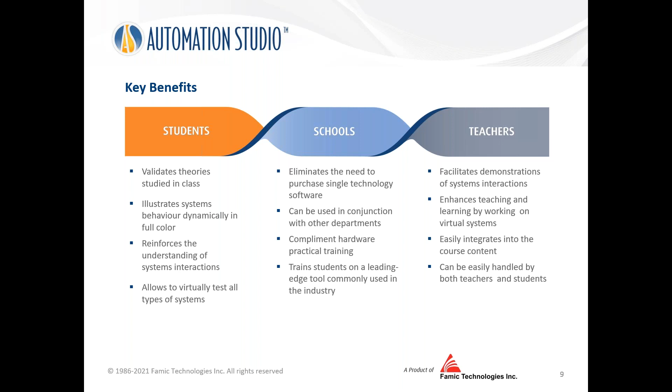We also have some exercises embedded in the software so students can learn and practice on it. It's virtual—right now hardware is a little bit difficult to get, so now we have the virtual software.

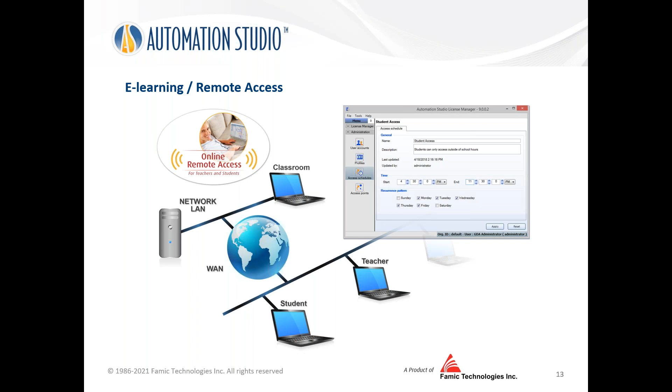We have network licenses, so students can practice at home and teachers can teach from home online, and they can interact with each other to learn different technologies—PLCs, electrical, pneumatics, everything in electronics and automation.

There are different markets like technical high schools, workforce development, vocational centers, technical colleges, universities, and so on.

We have a lot of industrial clients in agriculture, like AGCO; in construction, Caterpillar; in mining, John Deere; and in transportation, Honda, and so on. We also work with a lot of manufacturers' catalogs, including hydraulic, pneumatic, and electrical components, for example Mitsubishi and Eaton, and so on.

So I'm going to show the software and take a few examples so you can feel how we teach in this new norm, and how our software has a very good quality, providing quality education.

The first thing is, in one software we put all the technology together, and you can click and do whatever you want. For example, for mechatronics, pneumatics is a typical subject—you just open it to see. For example, teachers need to teach the symbols, so take the symbol. Traditionally, teachers use PowerPoint or PDF to teach symbols.

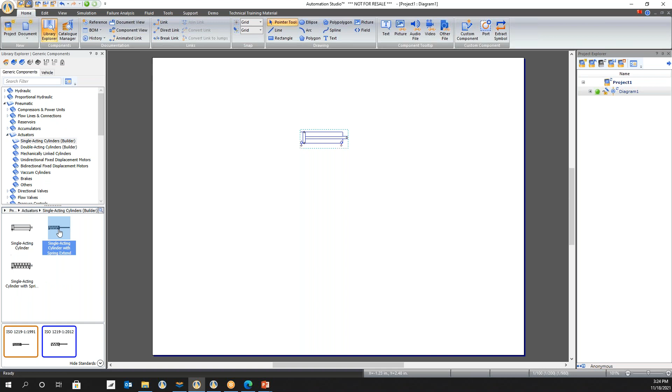Right now, we have a large library, and teachers can teach all the different types of cylinders. Now we can take others and build the circuits—this is component level. Also, we can teach at a different level.

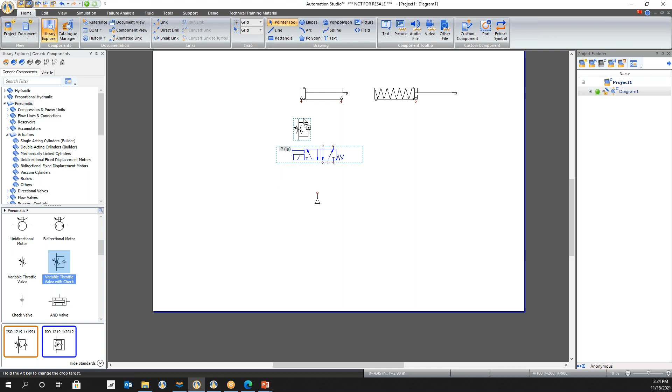At this level, we use different components together, and I put everything together—the exhaust and so on—and then we just connect them together, and I connect this one.

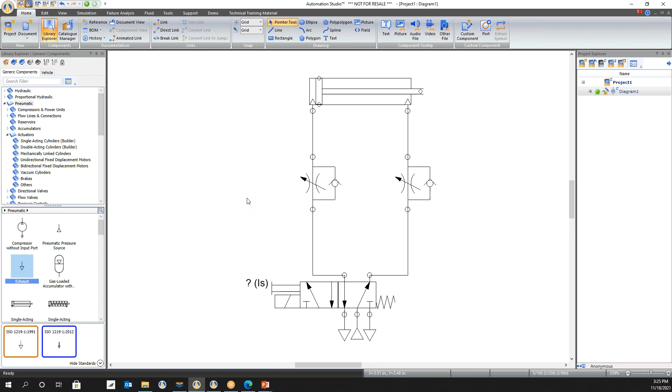So we can easily build a circuit. You can customize it. That's why there's no lab right now needed - all students can practice at home with the software, and then they start simulation to learn how it works.

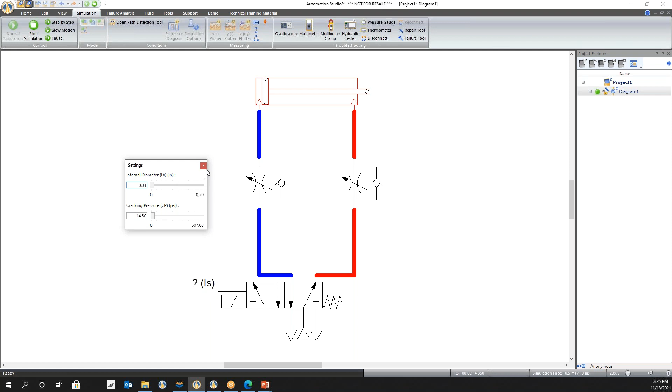You can see how the circuit works, how this component works. I change the parameter, for example, and we can see the speed is slower. This shows the function of this component, and the direction and control can be viewed and taught from this component.

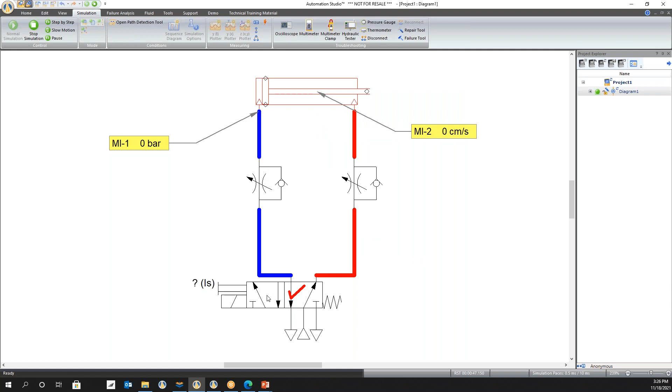This is how we teach different parameters. Technically it's not flash media - it's customizable based on your course curriculum, and you can do whatever you want. You can see the parameters of different components, and it's very easy for you to learn different technologies, phenomena, and so on.

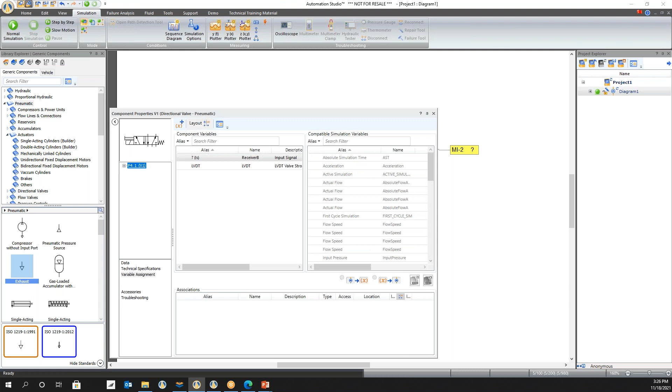This is a way we try to improve the teaching process and learning process. Teachers can customize component properties here, adjust different symbols very easily. There is a library - you can change anything to customize the component.

Now here's one technology, and you want to connect it with another technology. For example, we have electrical - so at the same time we provide electrical circuits, and I can show you the circuit we created. I put a simple electrical circuit at the same time, and I put the solenoid here. Very easily, you can connect different technologies.

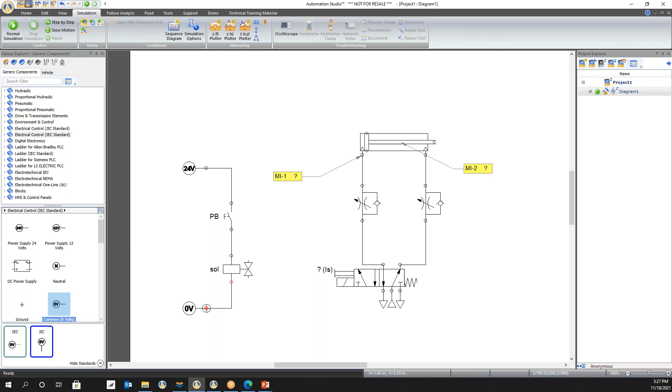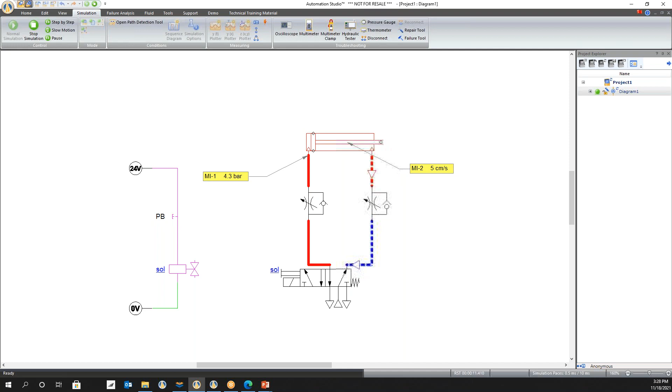Now the electrical circuit is the same as pneumatic. You draw them, then connect this one, double click, and you can connect this with everything from the electrical circuit. Connect them together, start a simulation, and you can click - the electrical circuit will activate, and switch very easily, connect electrical.

So this is what we teach - two technologies together. If we go another level, let's see something more complicated, for example the electrotechnical. In this environment, I go to another library and switch it - in this one, the same thing, I can create an AC/DC circuit.

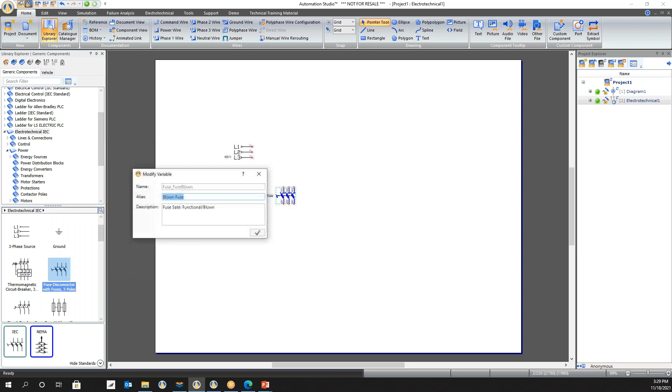For example, I have a power source - let me see, oh I take electrical, I think here we go. So the same library, we have all the energy source, power, energy converter, transformer, motor starter, protections, and so on. We can put this one here, and put one here, the fuse, and also I put

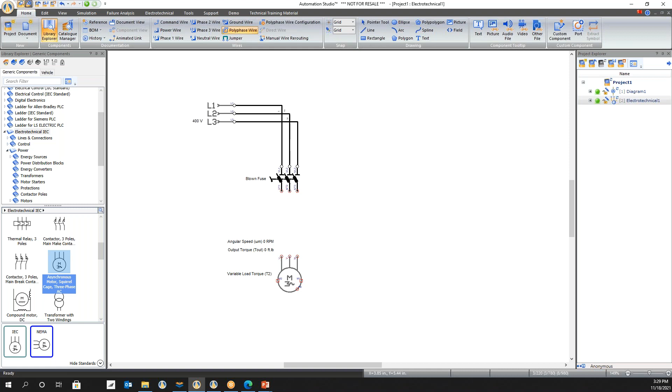AC motor. In this case, we can connect the circuit directly in the electrical circuit. In this circuit, we start a simulation, and you click, you can see the animation.

So this is the motor change. If you increase the load, you see the speed variation, and also you can measure the current in the wire, and measure the voltage between these two nodes, and you increase the torque, you see different parameters change.

Also for students, they can use different measuring instruments, for example the multimeter, so he can choose different instruments like a multimeter to see different parameters like this, also the clamping multimeter. So by using this, the teachers can measure different parameters in the circuits.

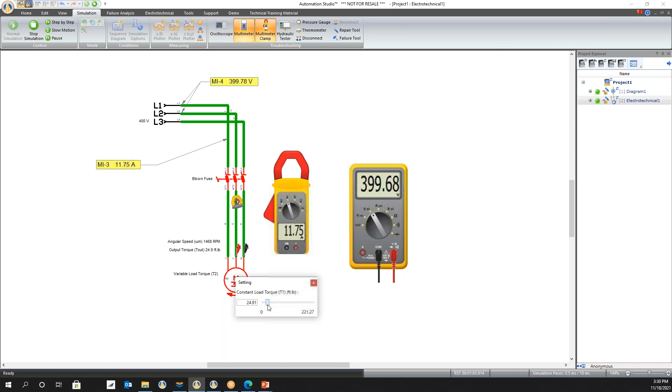And also there's an oscilloscope. This oscilloscope gives you a virtual idea of how it works, how to detect different parameters in the circuits. So in this case, students and teachers can learn the theory of the circuits completely.

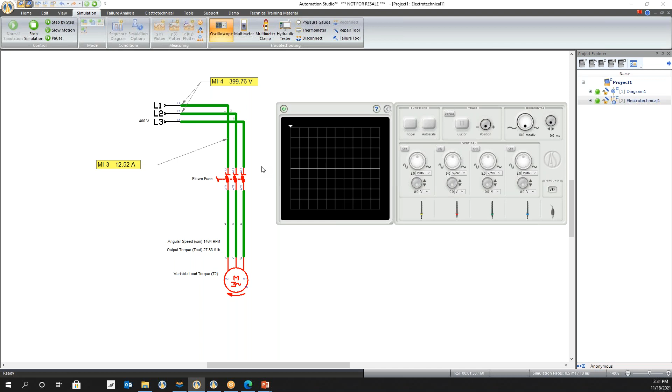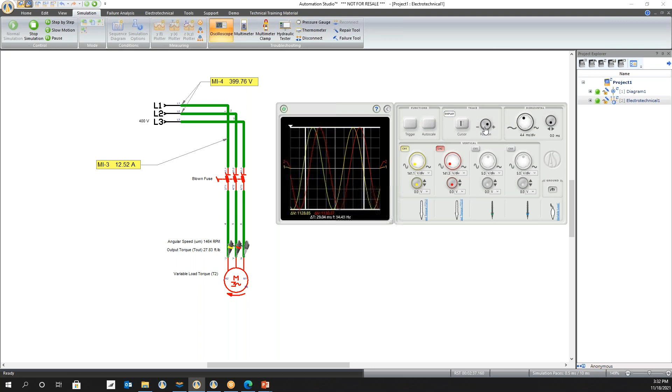Like this one, different phase. And if I put the two together, auto scale, and you can see the difference between the phase of wire 1 and wire 2, you see the different phase, and you have the different cursor, different position to see how it works.

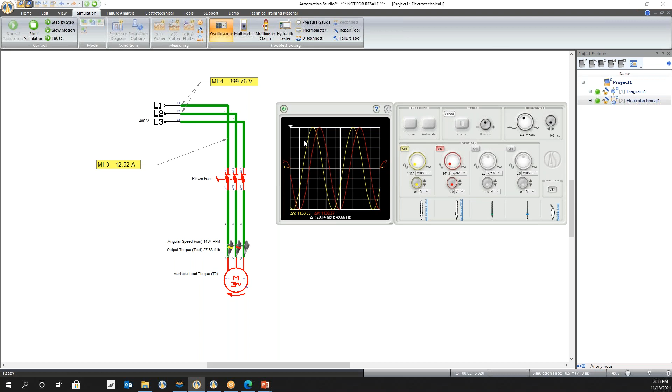So in this way, schools don't have to be worried that these instruments can be broken, but the teachers can teach different concepts for the AC circuits. So this is another level we want to bring teaching to, a new and innovative norm. So now I close this part. So as I turn it off, so this AC circuit we created.

Now I also want to analyze, do some technical things. You can double click to see the data. There are many data you can modify in each component. This is the same as pneumatic I showed you here. If you go to pneumatic and double click one component, you can see different parameters. So you can always change them and see the effect right away.

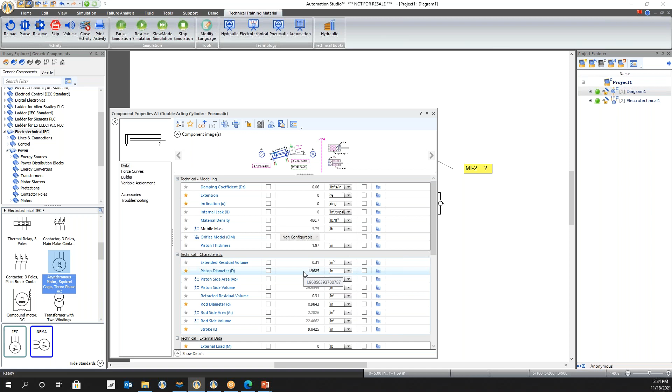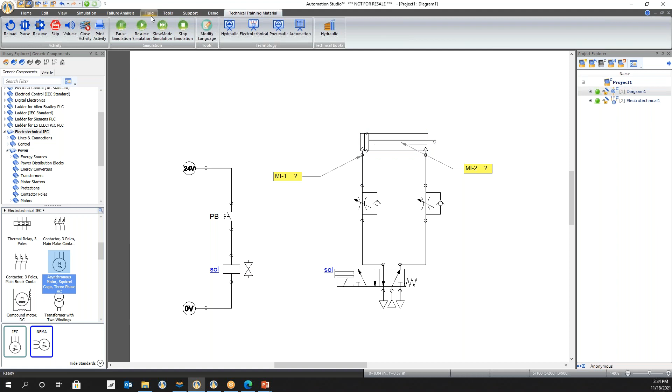For example, in this case, we have the cylinder, we extend the cylinder and make it bigger. For example, I increase the cylinder stroke a little bit. So I just changed the technical parameters in this symbol. And you see we start, you see the speed, it takes longer to reach because it's longer. And we can also make it faster, and you can put a lot of controls on the parameters.

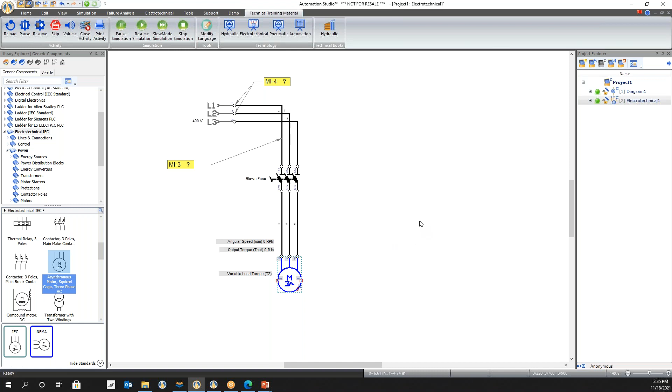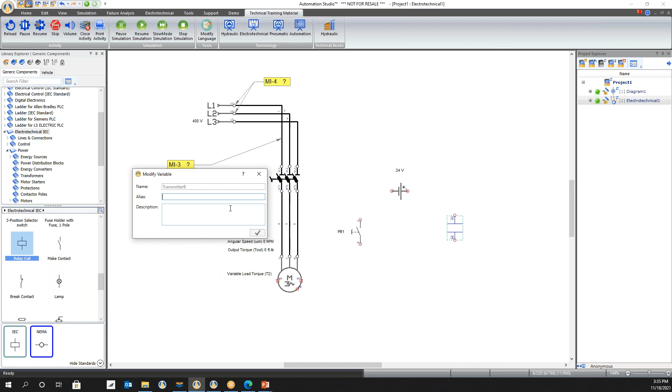This is the same for the electrical, you have different parameters for this motor, and you can change them. So next, this is the AC circuit. If we go a little bit more into the DC circuits, we can just change some parameters and put it here. And I have some, for example, the coil. Coil, yeah. And we also have the resistor.

So all those circuits I show you here, we connect them all together, and then I can start a simulation. Let me see the parameter, the km, and it's too big. Let me keep the big one. I'll show you how it happens if this parameter is not correct. This is the rated voltage 240, and I start the simulation.

You see, it doesn't work, so let me see if there's any current inside. Very small, and this one should change the state as this circuit changes. The reason why it didn't work is just because the parameter is not correct. So in this case, you can change the parameters and restart the simulation.

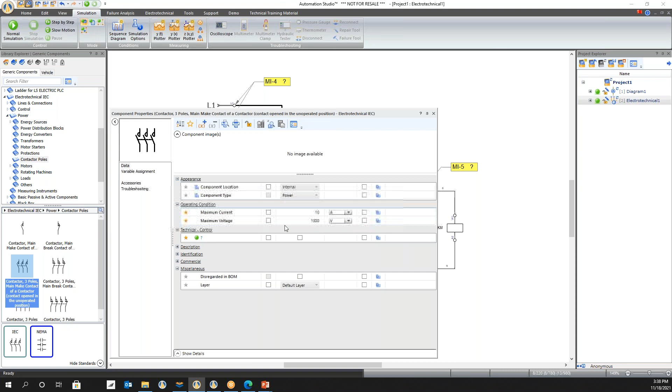Now I connect the DC circuit to control this electrical circuit to control the motor. So we can go here to a motor, for example, a contact pole, this one. But I use this DC circuit to control it, and again, very easily, we connect this with this KI. I will build connections. Now it doesn't work. Now activate this part. Now I put the control from the DC circuit on the AC circuit. This is how this works.

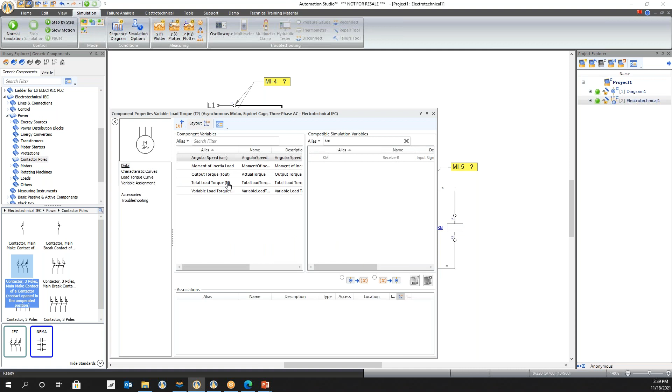So we have this solution, and you see it builds controls for different systems very easily, so that everyone can see different features and system interaction in a simulation mode. Teachers can teach with it, students can practice, and then they exchange ideas, and it's a remote and more innovative education. So this gives teachers and students more access to knowledge. Our knowledge is condensed in the component itself and in the theories.

If you want to learn some equations, we also have all the equations here, and you can build and validate these equations here. You can build different theories, for example, I can choose the output here as this value, and we choose different parameters, and we can change the different parameters and then transfer back. Transfer back, I think, is too much. Let's see.

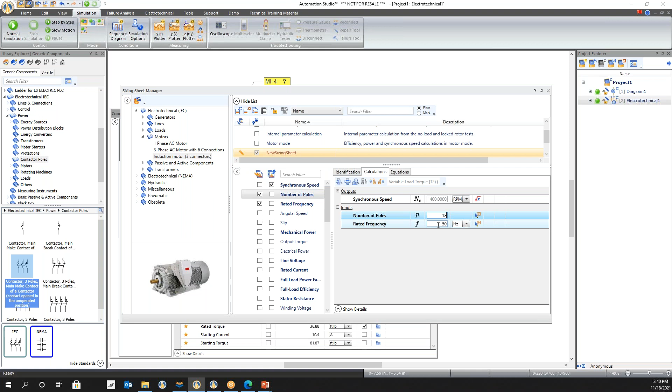Yeah, transfer back everything, and then you can have everything updated. Then everything can be inside. Then you can use this one to validate your equation. This is a way, and we teach all this.

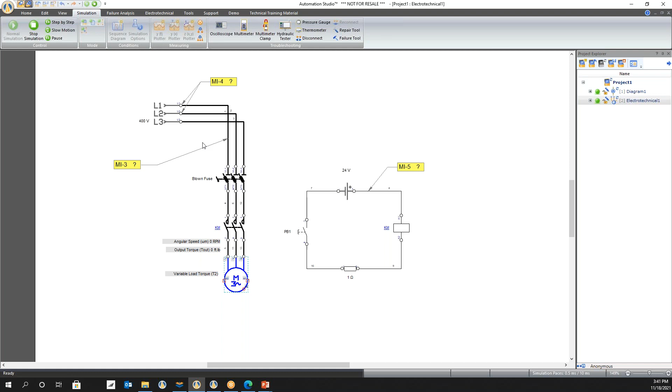Now there's other things. Now we come back to the circuit troubleshooting. Right now everything is fine. Teachers can do some troubleshooting things. For example, we have the troubleshooting failure tool. I just cut the wire and activate the wire. Now you see it lost the power, lost the connection, and you know how it works. You don't have to break your hardware equipment, but in the software environment, you can trigger different failure modes, and then now you can do some analysis.

So we can analyze the circuit with, for example, the multimeter. We can test: is the battery broken? No, the battery is working very well. This wire is working very well, and this coil is working very well, and this wire, oh, you see, it's not working well because it takes all the voltage. Now you can repair it, because this wire is broken.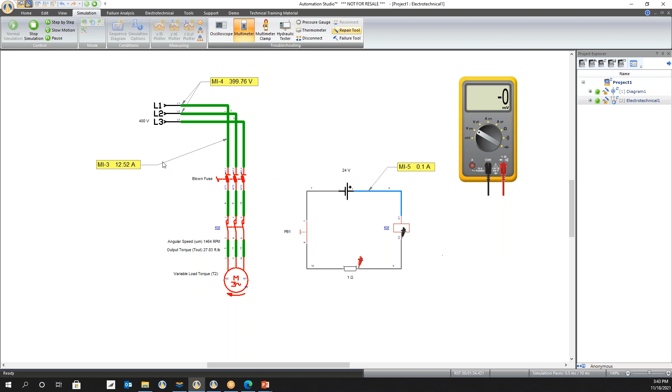So everything goes normal. So this troubleshooting function, our software provides you a very good environment to learn the theoretical exercise and everything you need to do, and it's very impressive. And so this is the part where we learn different circuits, different symbols in different technologies.

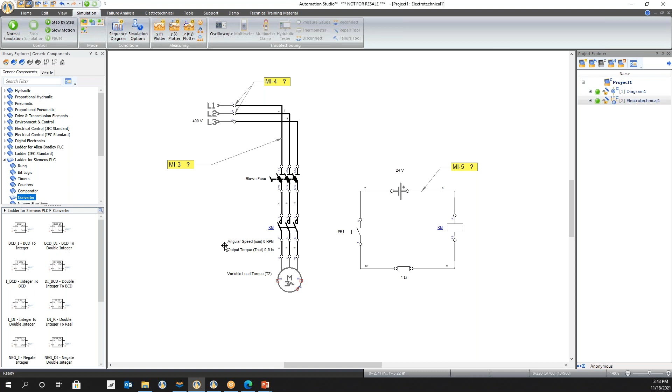And at the same time, we have others, for example, the PLC. You can learn the PLC ladder and use the PLC to control it. For example, I want to use the PLC to control these directional valves. So we replace this, and for the PLCs, we have different standards. For example, here we have the PLC, we have different components, and also different PLC cards, input card, output card.

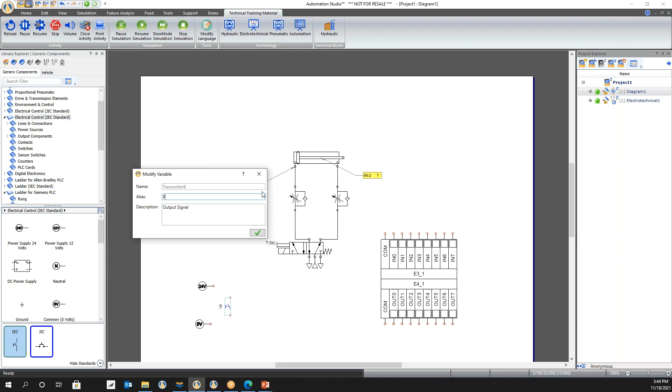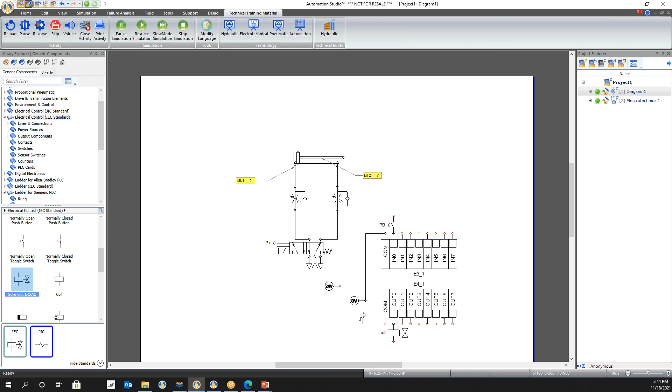And also we have different controls: the push button and a push button and solenoid. The same thing. I put it here, and I push, for example, in. I put it here and the solenoid out, and so I connect this one with different symbols with this one, and I connect with this one, and I connect this one with this one. The same philosophy for the PLC card, and then we can build a PLC ladder.

So I believe a lot of colleges and universities train PLCs, teach PLCs. So we provide you a way to train PLC in a different approach. Everything you teach in your school is programming, but you never have such a nice object to control: pneumatic and electrotechnical, the motors, everything.

So let's see the sequence here. So now we use this one to control, very easy. This one is in 0, go here, very easy. We just control the in 0, and I connect this one. And this one out, we connect with this one, out 1, connect with out, connect. And then we connect the solenoid with this solenoid again. Let's go here, and we connect them together. And now you can see the electrical control.

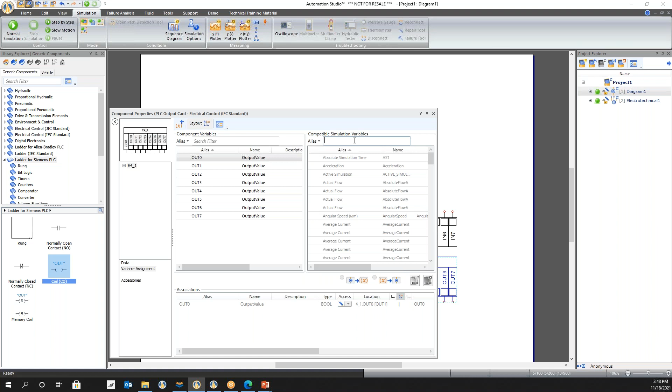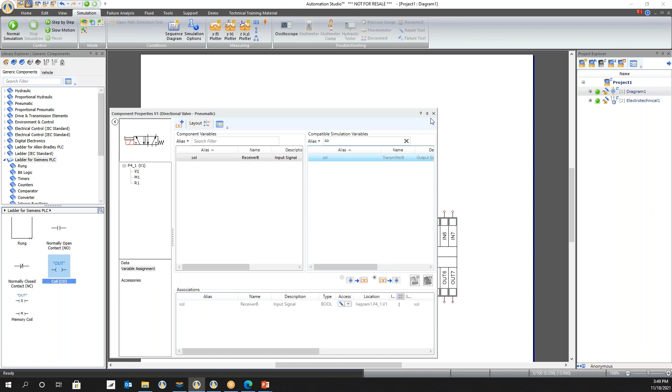Now I click this one. Okay, so let me see. Out 0, sorry, out 0 is this one. I think I made another mistake. Out 0 with out, with this one, with the solenoid. Okay. This one should connect with this one. I rename it a little bit. Now I fix the problem. So you see, I click this one.

Now here, I just want to continue this presentation. And here, I think we needed to connect this out 0 with out, and connect it with this one. And we start the simulation. Click, you see it's connected, and it runs well in this case.

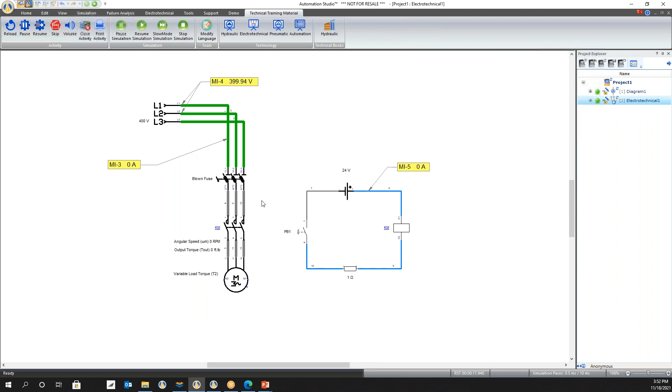So this is a PLC. We put PLC controls, and it can connect with pneumatics, connect with the electrical circuits, and then you can start and stop the simulation. Now we have this tool to provide simulation, controls, everything together, and also the symbols.

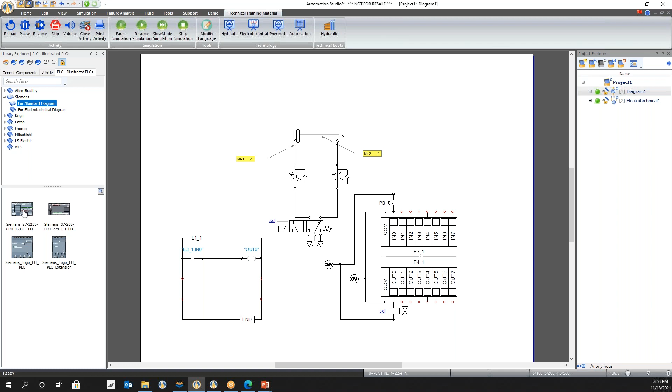For example, Siemens PLCs like this one, for example, S7-1200, and put it here, and you can replace this card with these PLCs. In this case, you can build more real-looking PLCs and do the wiring instead of this symbol. So this is another kind of symbol. We call it the illustrated library, and you can teach different technologies with the different illustrated libraries.

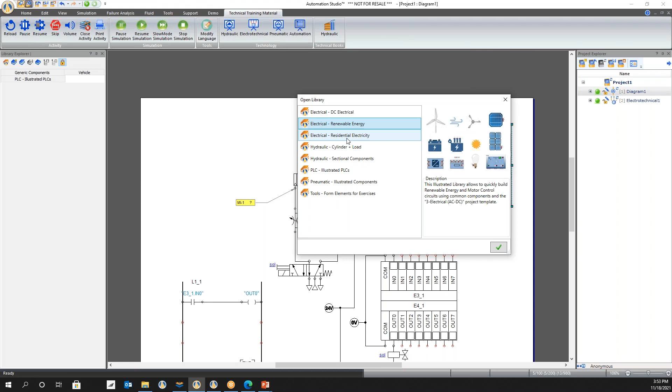Let me open some examples. You can see. So, for example, renewable energy is right now a popular technology everywhere, and you can see different components, everything like this. It's the same. You can drag and drop components, put everything together, and then see how it works.

Now I have some examples from real projects to share with you. The first one is PLCs. We have the Siemens S7-1200 PLC to control pneumatics with this illustrated library. The PLC is used to control the sequence of the different cylinders, different components, and start a simulation.

And start the same thing. You can see the different reactions. So right now I have a more complicated PLC logic, and everything is controlled. This is a sensor, this is pneumatic, and this is the PLC ladder. This is the PLC input-output cards. So in our software, we include all the complete symbols, and also the illustrated libraries.

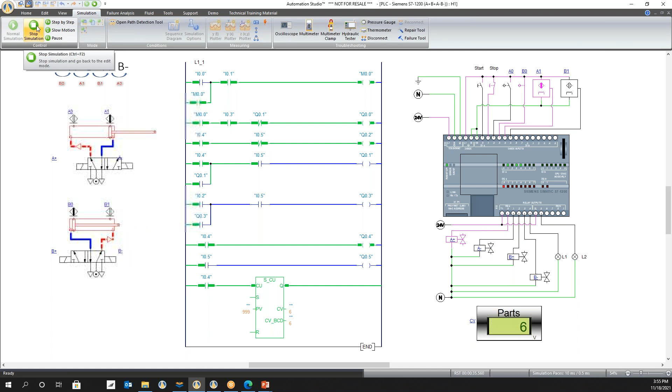This is one thing we created, and I'll also show another thing, electrical. Not only for PLCs, for electrical components we also have illustrated electrical components. The same thing, drag and drop from the library and build a circuit. And here is a comparison between two circuits. One is the AC circuit, the other one uses illustrated components.

So in this case, you can push the button and play the circuits. You can see how it works. And the same thing, you have different symbols in this illustrated library, and you can see the different parameters. And you can stop. You see the different wires. The same idea, but this is more illustrated. You can change the speed, the load, the torque. Start simulation.

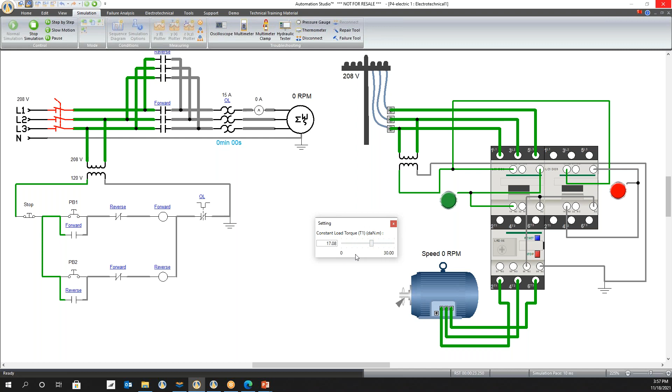So in this case, let me see. Yeah, you see all the lines are in color. How do you increase? You can increase it during simulation. The same thing here in the library. You can also increase the torque. You see the different variation of parameters and so on. So this is one thing, for the illustrated library.

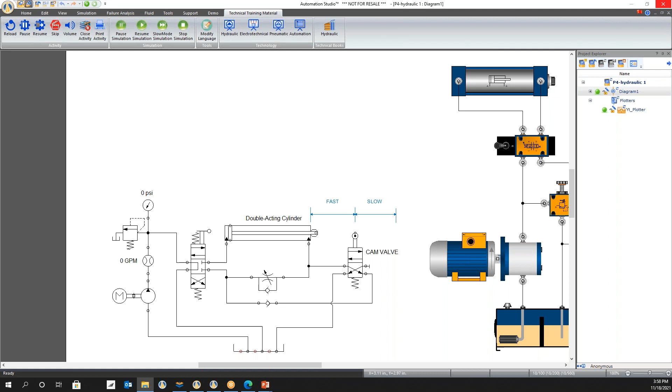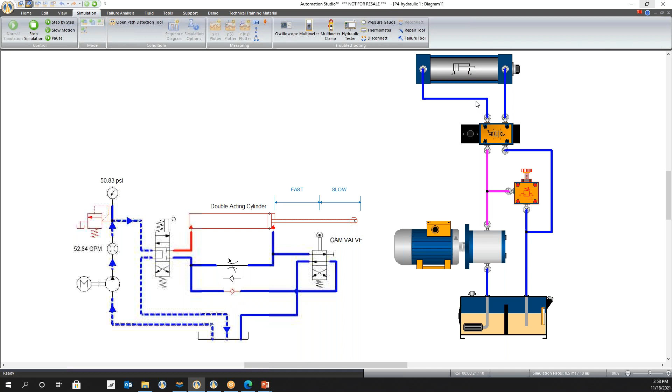And another thing, I'll go back to this project and get another illustrated library. Now I am going to show you hydraulics, and I know hydraulics is not that common a course anymore in the Philippines, but we have a complete hydraulic library too. So we start a simulation, and you can see the same thing. You can see how different circuits work, and you also have the illustrated library, with the flow and the components, how it works, what a real motor and a real cylinder look like.

These are some interesting things, and we are showing different libraries and symbols for teachers to teach and students to learn. We also have a library called the Catalogue Manager. With this one, for education, we include a lot of teaching material from industry. For example, we have complete material to teach different manufacturers' catalogs. For example, I'll show you something.

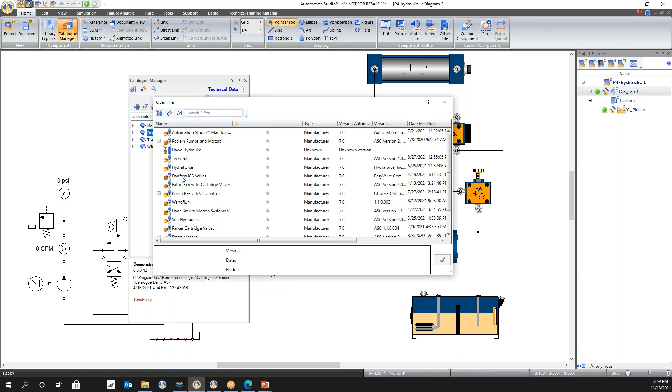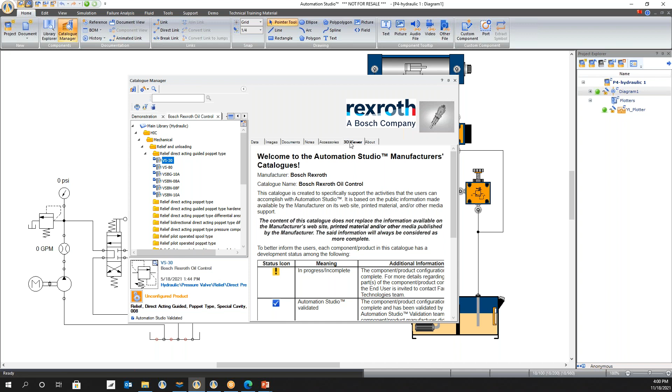For example, Bosch. Bosch is the largest hydraulic component manufacturer. So hydraulics, and you can click to open and see. In this case, we have a very nice 3D view of the component. For example, this is a common pressure relief valve, and we want to teach students what a relief valve looks like. And for this particular cartridge valve, you can see the 3D, and we can change the options. This is one type, and this is another type. This is the difference.

In this case, you can use our software to teach different types of components with the 3Ds, very illustrated, and students can learn very fast. So this gives you a lot of flexibility to teach and put all the documents together

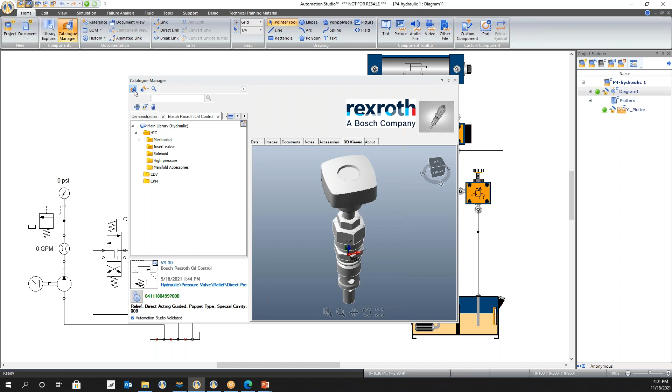to teach different components. So also, for example, I show you another example, typical for hydraulics. If you teach mobile highway machinery for excavators, wheel loaders, trucks, we also have very good components to teach. For example, we take one example from Bosch Rexroth again. We have a large library of different manufacturers.

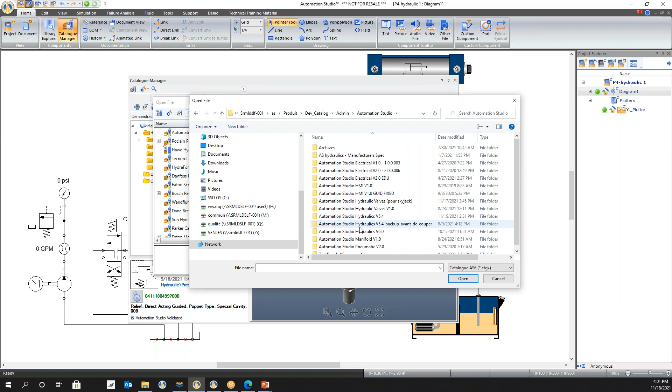And for example, I take this one here. So in the library, you can teach, for example, what a pump is. I take a Bosch Rexroth one, and I take one component from here, and we have a test bench to show how this component, this piston pump, works.

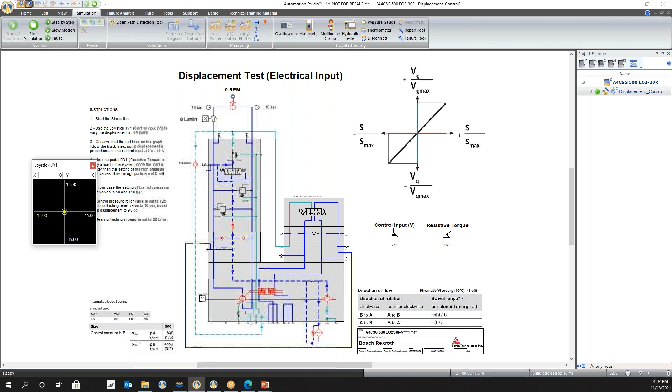So in this case, we built training material from the industry, and this is a piston pump, this is a motor, and this is a very commonly used component for mobile machinery, for example excavators, ships, trucks, mining equipment, tractors, and so on. And you can use this one to change the flow. You can see the flow during the operation.

You can put a load on the motor. You can see the pressure variation. So it's very easy for you to teach all the theories in hydraulics, and you don't have to build anything. You just open, click, and it all comes out.

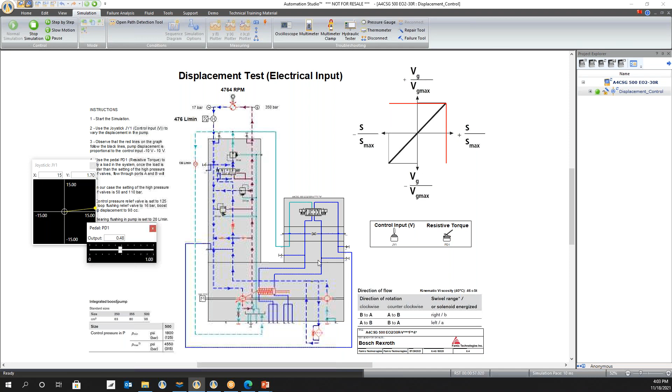So this gives you a lot of teaching material, a big library, a big database to teach different things. Students can learn by themselves, and it's really good for them to learn, to explore. There are instructions. It's very illustrated how this component works, and teachers don't have to use Flash. You just open the different components, and you can reuse them all the time. So this is another typical example I want to show for hydraulics.

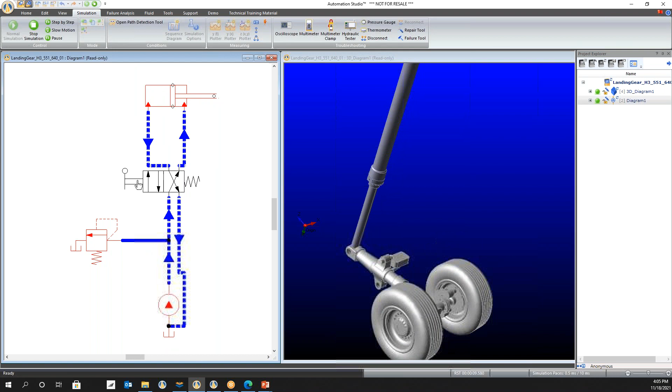Another thing I want to share with everyone is we also have very good 3D. The 3D example I want to provide today is an aerospace example. In this example, we connect all the 2D with the 3D. Because 3D right now is very popular everywhere and very visual, but no one can connect the 2D and the 3D. In our software, we have the 3D part connected to this 2D hydraulic circuit and the control. You can see it very easily. This is a typical landing gear. And this is one case.

And I also have another one to share with you, another 3D for the factory. Let me open this. Just wait a little bit. Yeah, put it in the middle. This is used for a factory.

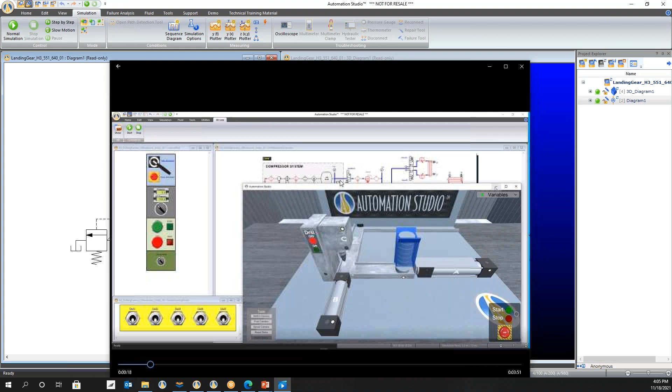So we have the 3D connected with an HMI, and we use this HMI to control the 3D, control the pneumatic circuits and the PLCs, electrical, put everything together. So in this case, you teach different technologies in one software, and you can see how it works and how the different technologies interact with each other.

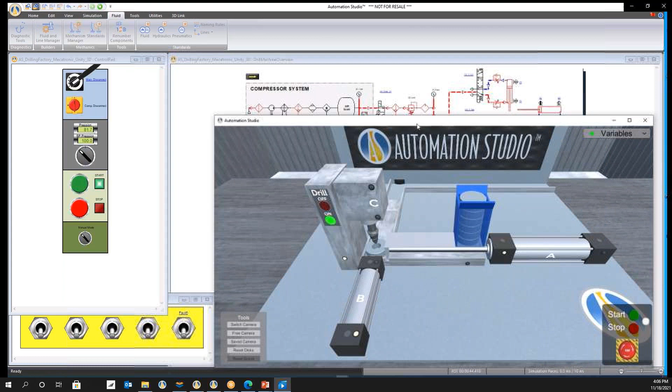So this is a 3D, and those materials are built in, and you can get them from our website, and you can build and connect them easily. You can customize them. So this allows students to practice, to learn how 3D works, because it's more visual and students can learn different aspects in the 3D. And with the 2D parts, together they can learn everything.

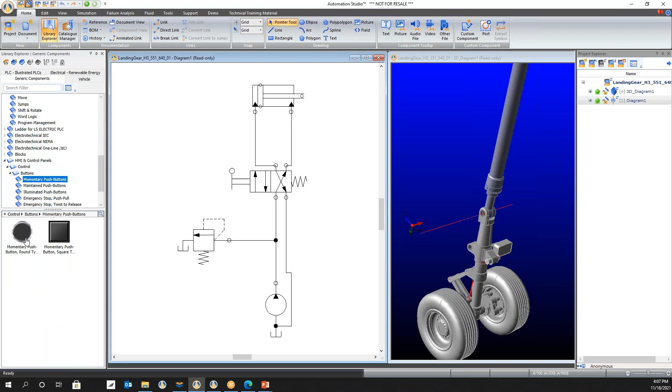So here is the panel. We have the library for this panel. You can build your panel with drag and drop. I'll just show a little bit of the panel. We have this library called HMI at the bottom. This library has all the components and all the buttons, and you can drag and drop them here. So you can customize HMI panels to control your machinery, make it really look like a virtual digital twin solution for your hardware, for your projects, to teach different things.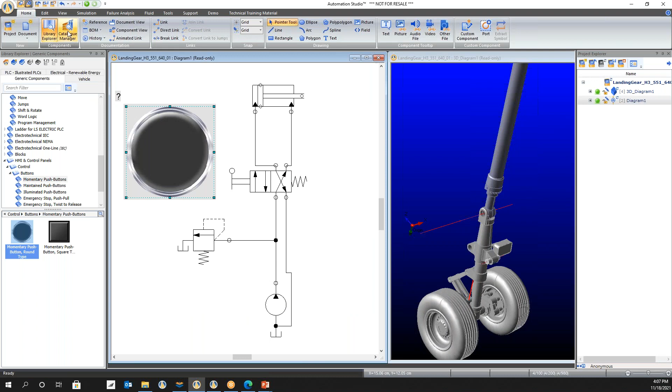And besides, we have some electrical catalogs. The electrical catalogs show you, for example, the variable frequency drive. Let me see if I can find a variable frequency drive.

So if I open the Electrotechnical, the motor drives, let me see. I take VFD from Allen Bradley, PowerFlex.

So while it's loading, I show the example in our website. So you can download all the catalogs from here. For example, I mentioned all the VFDs we have. We have many VFDs.

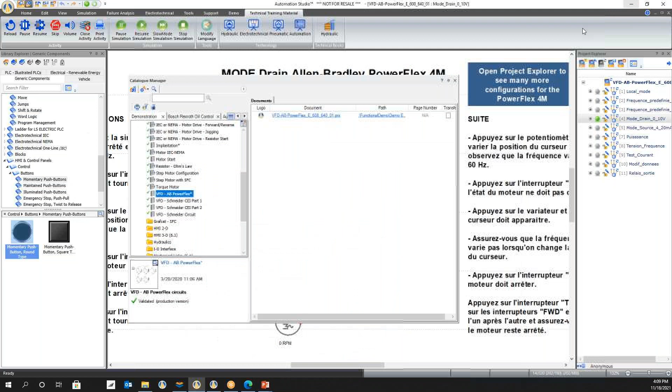There are a lot of variable frequency drives: Allen Bradley, Mitsubishi, Omron, Siemens, Yaskawa, and so on. So in this case, I show you one example here. This is Allen Bradley, and you can download everything to reuse in your teaching.

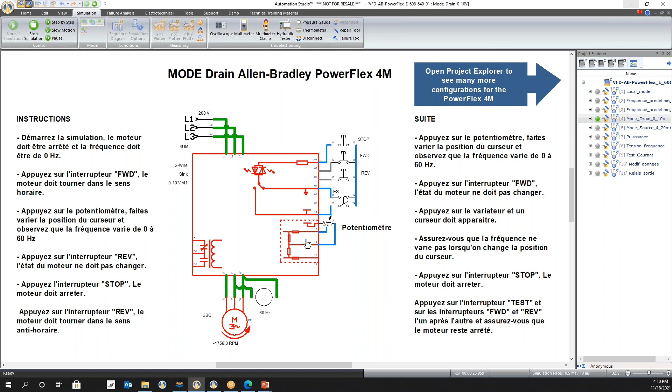So this is the motor control to control the motor with the variable frequency drive. First, you can teach forward, stop, reverse. See the speed animation. There are different types of VFDs you can build here.

And for us, it's very easy for teachers to take from the catalog, and I just put it here. I see it's electrical.

And all this material I showed today is shareable with our clients and teachers globally, and you can download and study, learn, and everything is shareable.

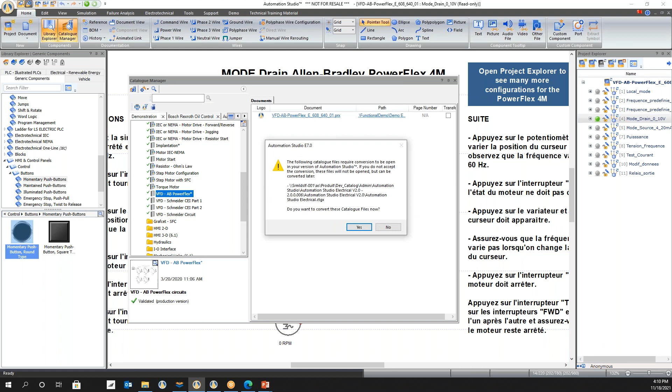So we spent years building these catalogs and teaching materials for our clients with industrial expertise from industry and also from global teachers from United States, France, Germany, China, Japan. And we collected all the feedback.

We built different teaching materials. And let me go to the forum we have. If you go to our website, go to forum, you can download everything from the education section.

And so we have different files, for example from PLCs. So you can download all the files also, and you can learn very easily.

Also, you can share. If you are our client using our software, you can create a circuit and post them regularly. And let me see.

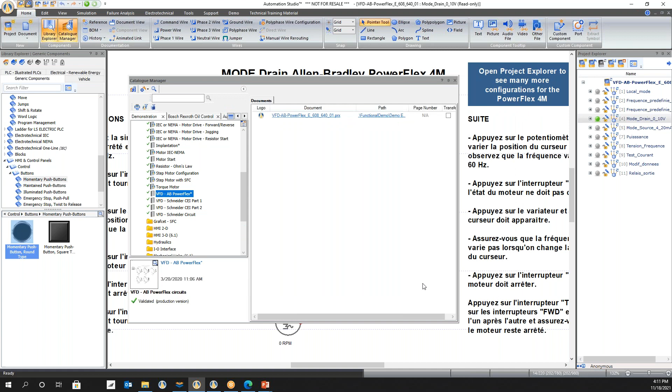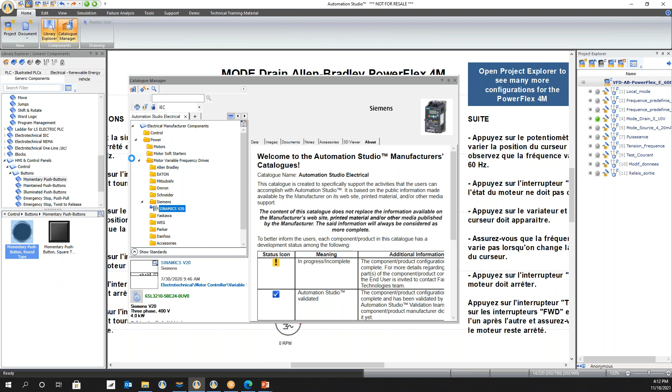What you have to do is configure it here from different voltage and setups, and then close. It's the same as the library, it is in a different library.

Let's create a new project. I configure it, and so I open a new one, and then you can put it here. So you can configure it here and then put it in the circuit.

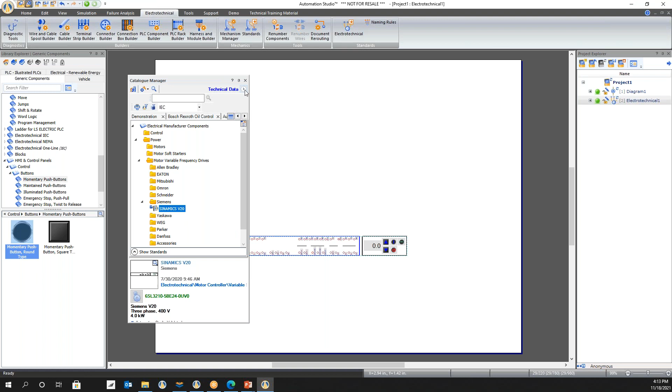You can draw, you can connect what you need from your real application. So in this case, there is also a database here, the teaching material. You just open it, don't save, and open it.

This is another circuit for you to use to build the VFD. In this VFD, we have many parameters you can choose, select, and work on.

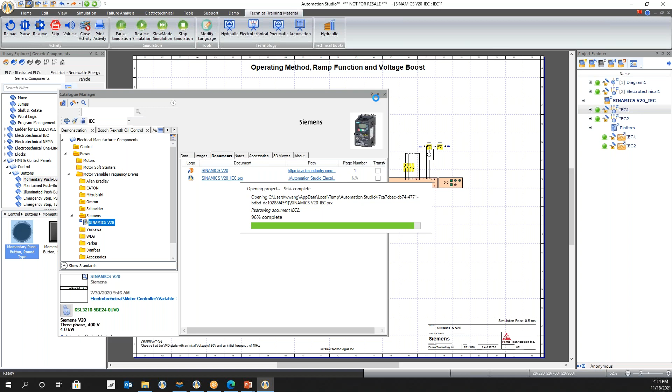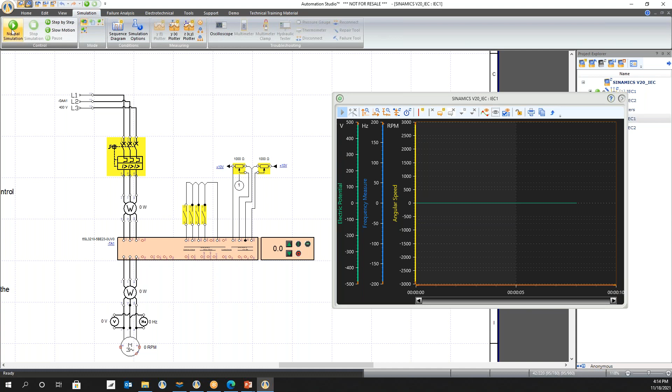So this is a VFD circuit, and we have a plotter to plot the performance of the circuits. You have different options here.

And to manage, you can change the settings, everything. You have different options to design it. So this gives you a lot of flexibility to design the circuits.

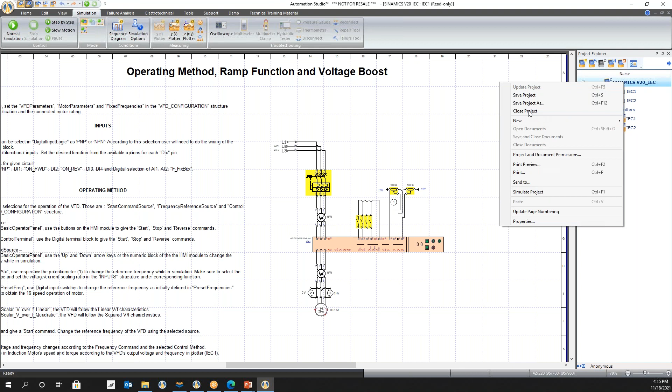So we have this one. This is the circuit you are going to use. And I have another example, and maybe the last thing we share with you is we have other examples here.

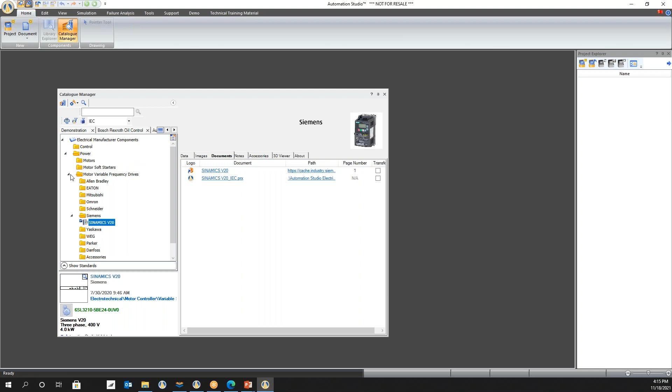Power, and we have soft starter. Different, for example, ABB soft starter. Also here you can configure it and build a soft starter.

So we put different brands together to create a nice circuit to show how it works, to let people understand our concept. So this is the soft starter, and you have a nice circuit to reuse. You can modify everything in the circuit.